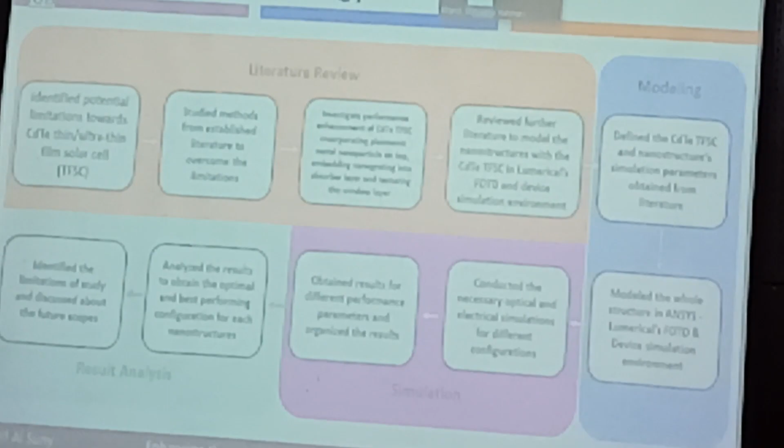So, our research methodology can be divided into 4 sections: literature review, modeling, simulation, and result analysis. First, in literature review, we identify what are the limiting factors that are affecting the performance of our cadmium telluride solar cells. Based on that, we further reviewed the literature to come up with different light trapping techniques that can enhance the performance.

After that, we define the simulation parameters from the literature and conduct a simulation in a simulation environment. We have used Lumerical device suite. Later, we conducted our simulation and varied the morphological features of the different nanostructures that we have implemented in our cadmium telluride solar cells. And finally, we came up with different results, and based on the results, we found the optimal configuration of our nanostructure that gives us the best performance for our cadmium telluride solar cells.

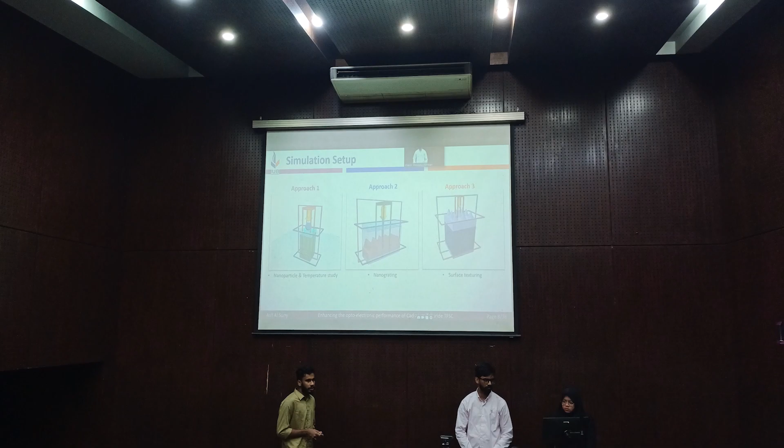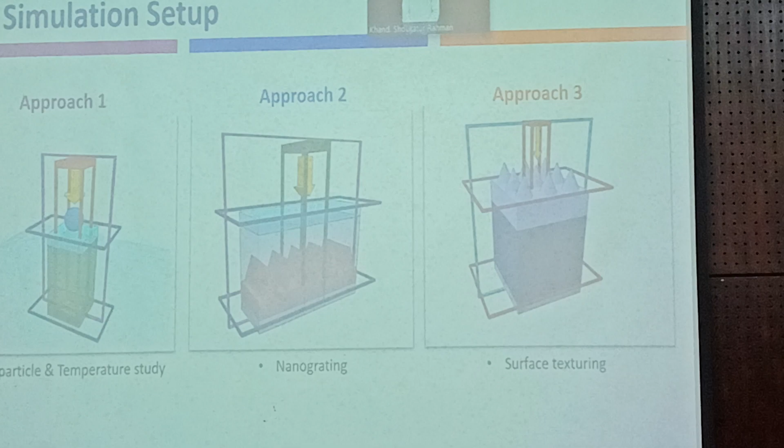So this is the FDTD solution setup for our first approach, where we have placed the metallic nanoparticle on top of our substrate. You can see the necessary monitors that are recording different parameters.

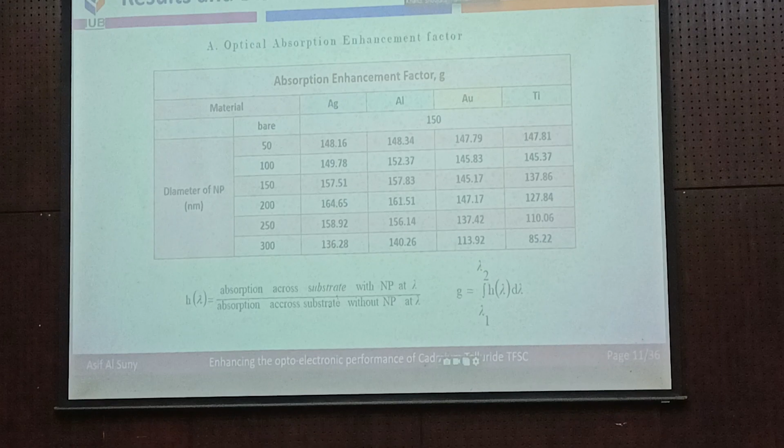The first performance parameter is absorption enhancement factor. It is measuring how much enhancement is taking place over different frequency points. We have taken 150 frequency points over a wavelength range of 400 to 1100, and you can see that silver 200 nanometer diameter nanoparticles are giving us the highest enhancement.

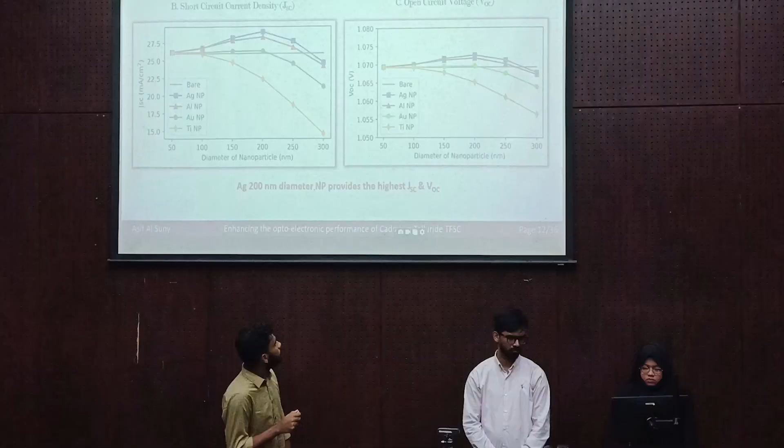This is the short circuit current density and open circuit voltage. You can see that in both cases, silver nanoparticles are giving us the highest enhancement.

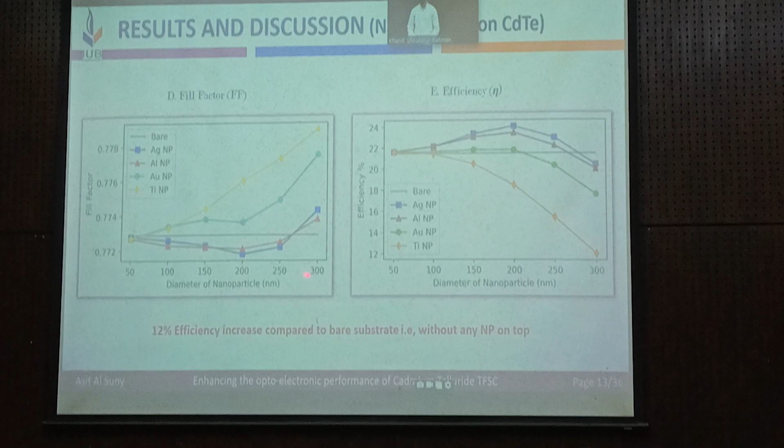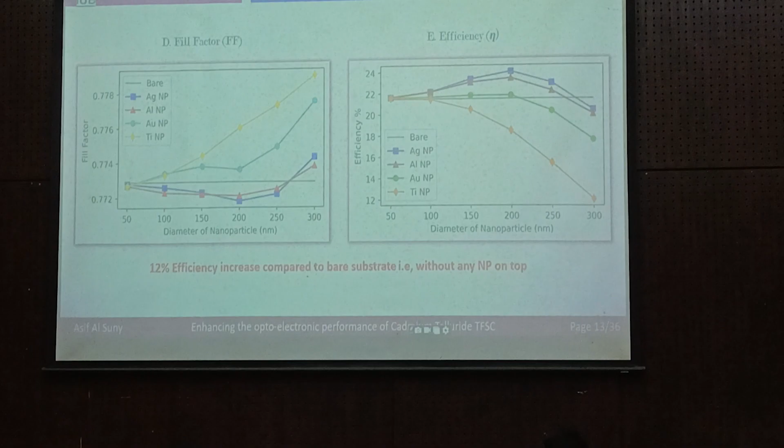Next, the fill factor analysis. However, silver is not giving the best performance. However, the change is not significant and does not affect that much when calculating the efficiency.

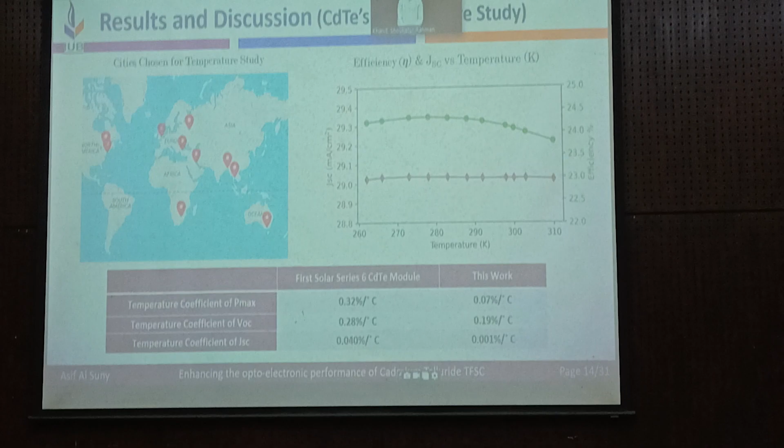We further did the temperature variation study where we have taken temperatures of 10 different cities around the world. For example, we have taken New York, Ottawa, Johannesburg, Melbourne, Dhaka, Bangkok, etc. We compared our results with First Solar's Series 6 module, and found that our proposed design is working much better compared to that module.

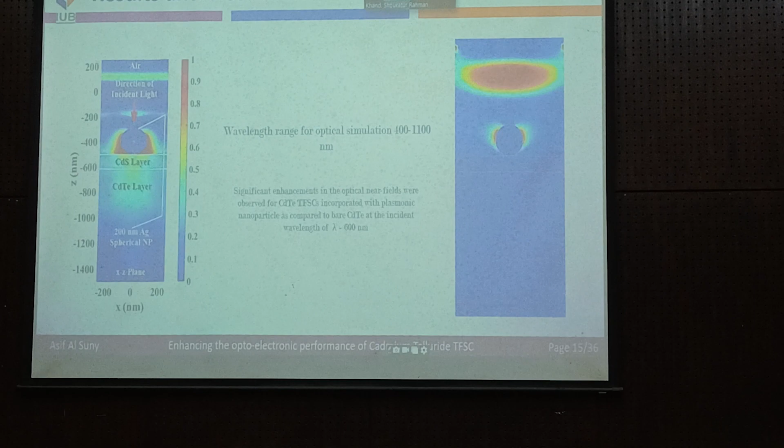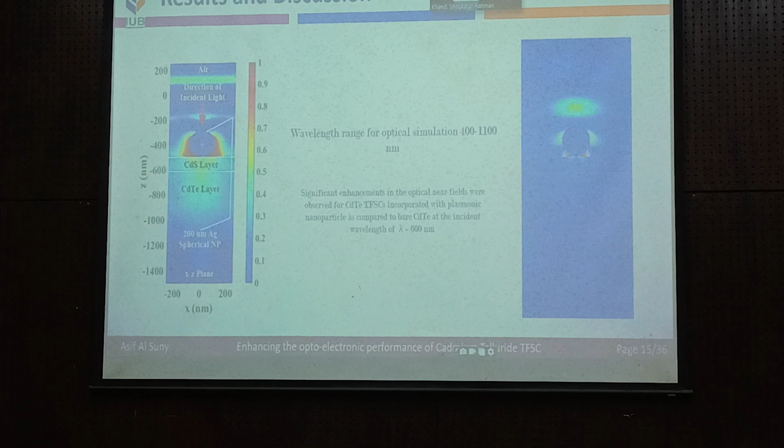This is the optical near field image, and the movie monitor which is capturing the electric field interacting with the nanoparticle and the substrate. We have generated this near field at a wavelength of 600 nanometers, and you can see the

enhanced light enhancement within the close vicinity of our nanoparticle, and it also helps it to generate more electrical field into this system.

Now I'll be talking about approach 2. As you can see, for approach 1 we placed a nanoparticle on top of the absorbing substrate. Now, fabrication of such nanoparticles is very difficult if we think in terms of fabrication.

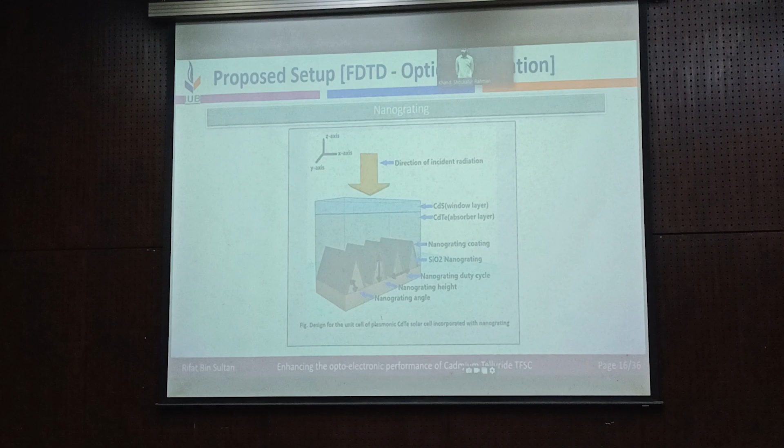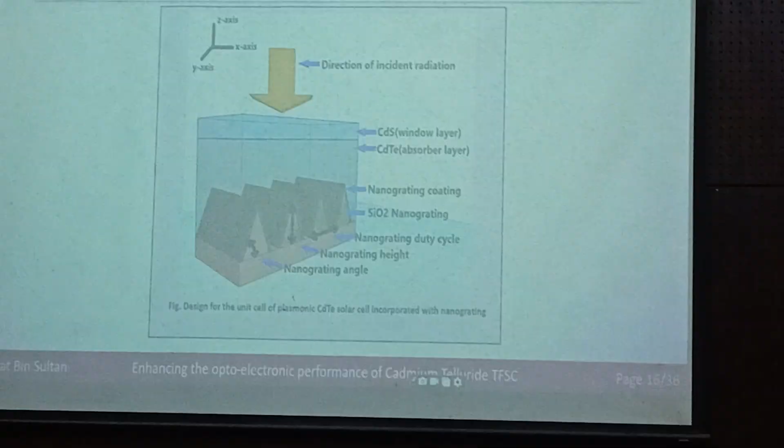Placement of these nanoparticles and making sure they stay in their right place and show proper function is very difficult in terms of fabrication. So for approach 2, we studied a more mature technology for enhancing the performance of our thin film solar cells.

That is, we tried to embed a nanograting structure within the absorber layer. Now this nanograting structure is essentially increasing the optical path length of the trapped light.

That is, the amount of light that is going inside the absorber layer is again being reflected back into the absorbing substrate. So the duration of the light staying inside the absorbing substrate is increasing, which in turn increases the conversion rate of photons to generate electricity.

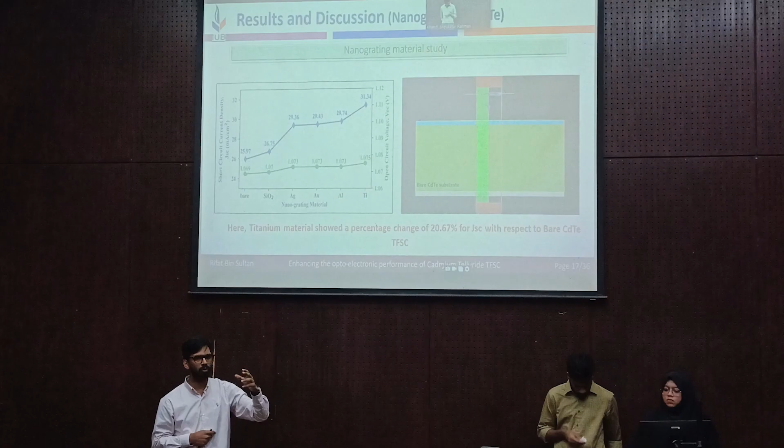Moving on. Now, if we are placing an embedded nanograting structure inside the absorber layer, it is very important for us to determine a good material selection for that nanograting.

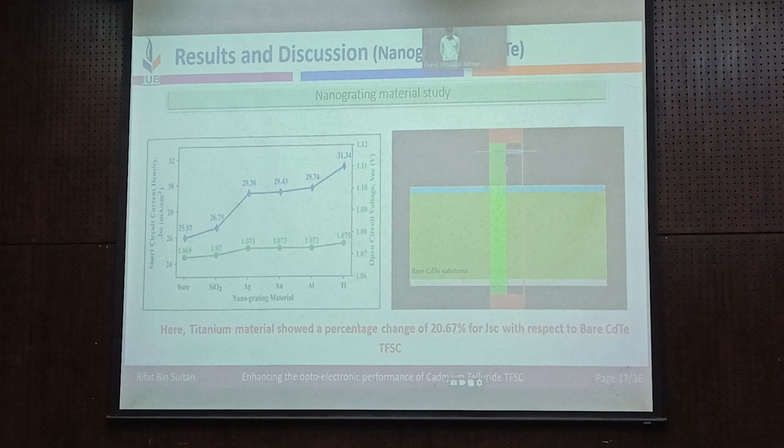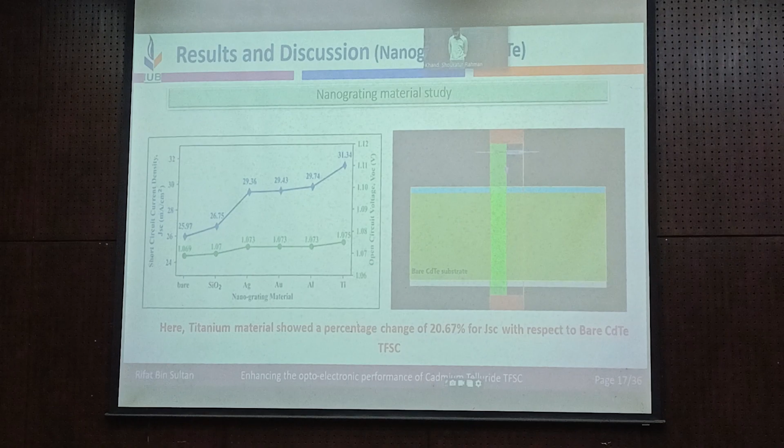So we did a material study for this nanograting, and we studied 6 different materials. Here, bare represents cadmium telluride thin film solar cell without any nanograting structure, whereas silicon dioxide, silver, gold, aluminum, titanium represent the material of the nanograting structure used.

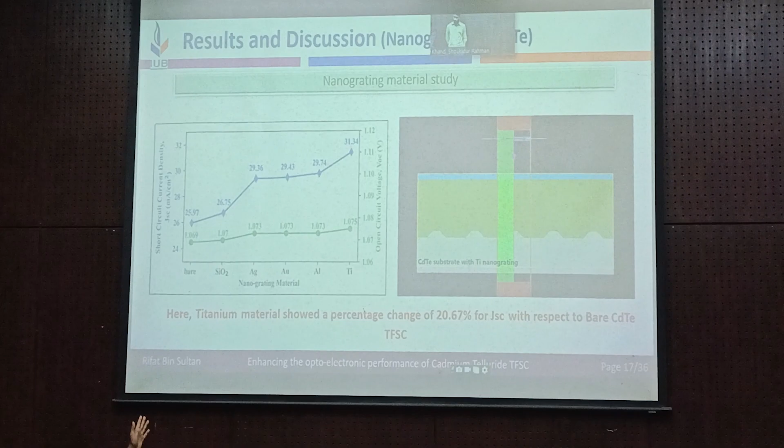As you can see from this graph, titanium stands out as the suitable material for fabrication of the nanograting that will be used. Moving on to the next slide.

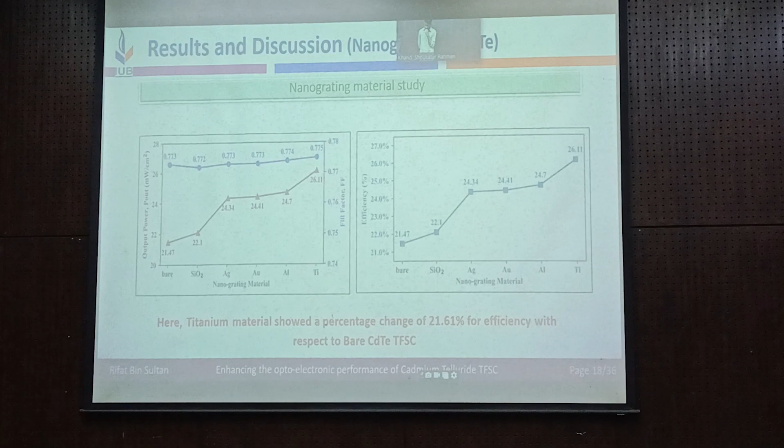We also checked some other electrical performance parameters that are economically or commercially more significant, for example output power and efficiency. In all these studies, titanium shows better results compared to other materials as a suitable material for the nanograting structure.

Moving on to the next slide. For this nanograting structure, there are many properties: nanograting height, nanograting duty cycle, and nanograting angle. All these parameters can have multiple combinations and multiple values of their dimension.

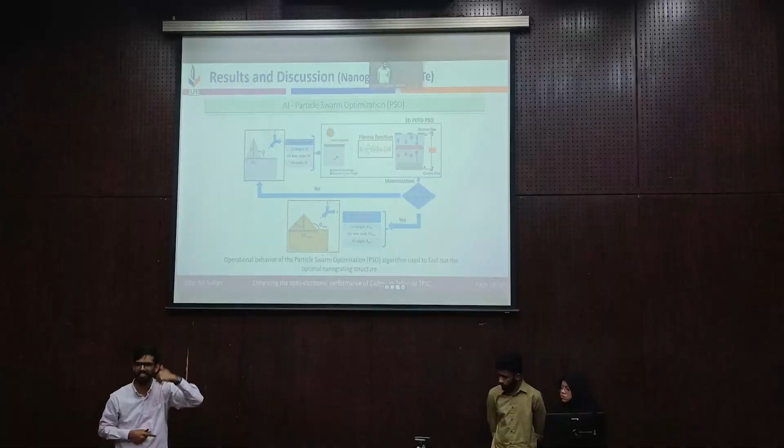Our chosen parameters were nanograting height, nanograting duty cycle, and nanograting angle. Using this algorithm, we set a range for all these parameters within the algorithm, and this algorithm was run based on different generation sizes, and they returned the optimized value for all 3 parameters.

Moving on to the next slide, we can see that for these 3 parameters we have set 3 different ranges.

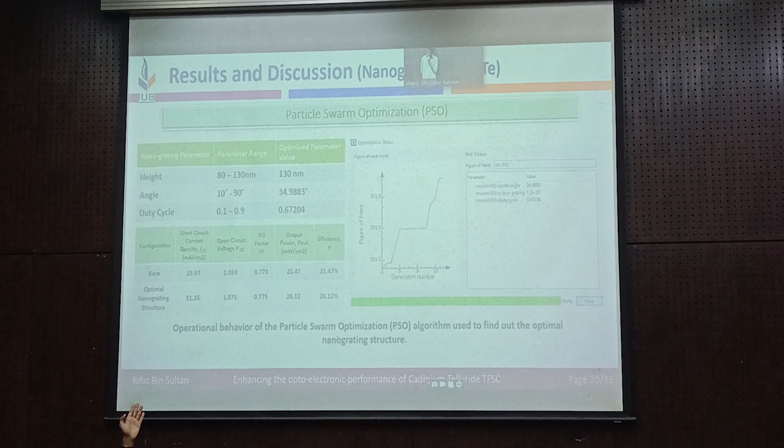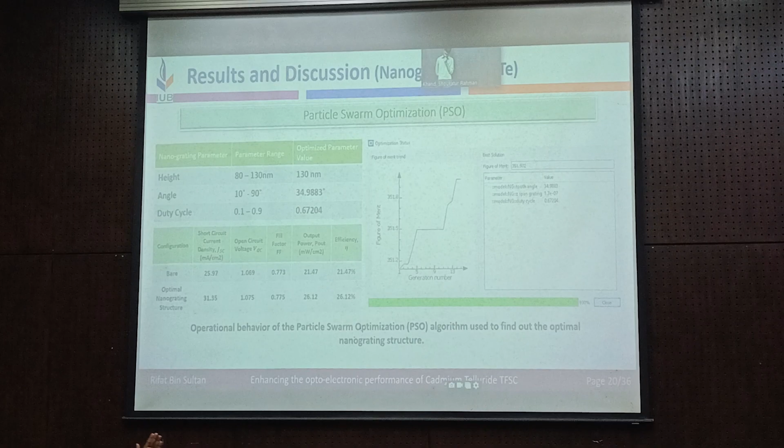For the nanograting height, the range was set from 80 to 130 nanometers. For angle, the range was set from 10 to 90, and for duty cycle, the range was 0.1 to 0.9. Within all these ranges, our algorithm returned us the most optimized value.

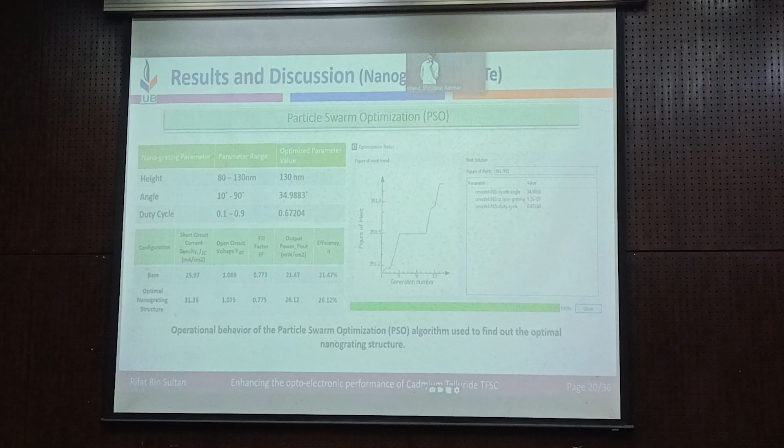What we did here is basically save a lot of computational power and let the algorithm return us the most optimized value. We can see, compared to the bare cadmium telluride thin film solar cell with no nanograting structure, the one with the optimized nanograting structure performs better in almost all the electrical performance parameters.

This is one of the screenshots that returned us the value with the optimized parameter, and this is the generation number. We set a generation number for the simulation as well, after how many generations we want our optimized value. This is how the optimization curve works, returning us the value of the highest short circuit current density.

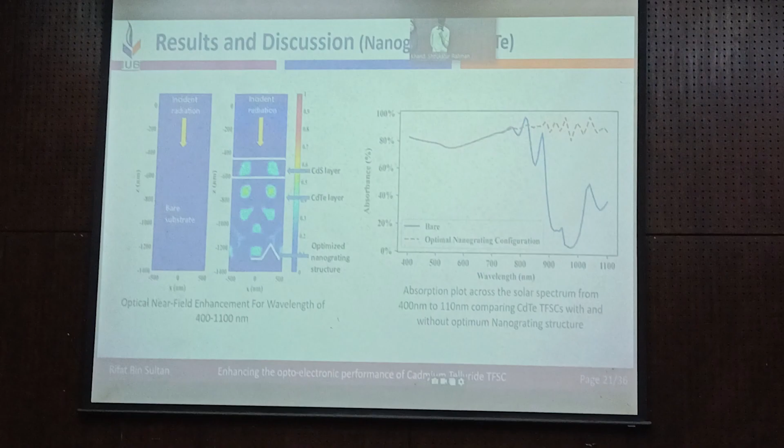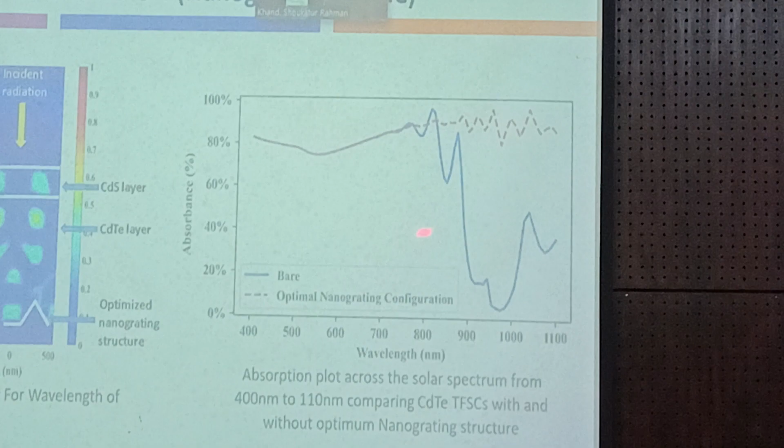Conventional solar cells help us trap only a small part of the solar spectrum, that is, only solar light within the UV to visible range. But our proposed structure is helping us harness solar spectrum beyond the visible range, allowing us to capture part of the spectrum beyond visible light.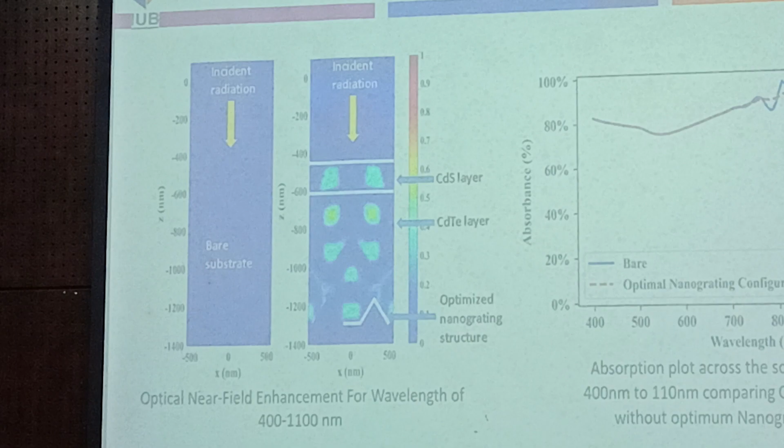We are getting wide spectrum absorption in our proposed structure compared to the bare structure, where in the near IR region there is almost no absorption. Our proposed structure shows absorption in the near IR region as well, so we are harnessing more solar power using the same structure.

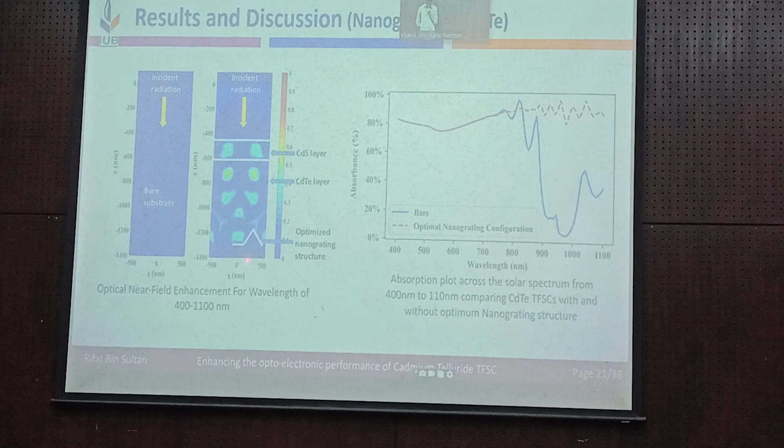This is one of the photos showing how the trapped light is being reflected back into our absorbing substrate, thus increasing its optical power. Moving on.

This is the FDTD setup for the proposed design, which is surface texturing with nanocones. As you can see, we have textured the CdS surface, which is the window layer of the solar cell, with nanocones.

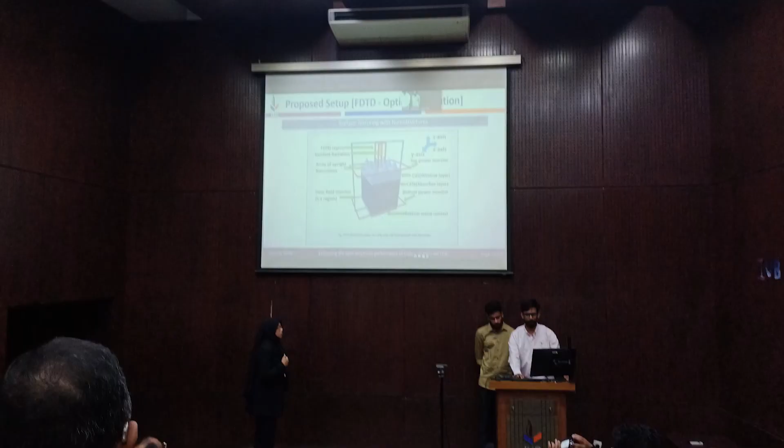So basically, we took 3 morphological parameters to determine which design gives us the most enhanced or optimized result for each generation. At first we kept the pitch constant, the cone-to-cone distance, at 100 nanometers, and changed the diameter and height range of the cone.

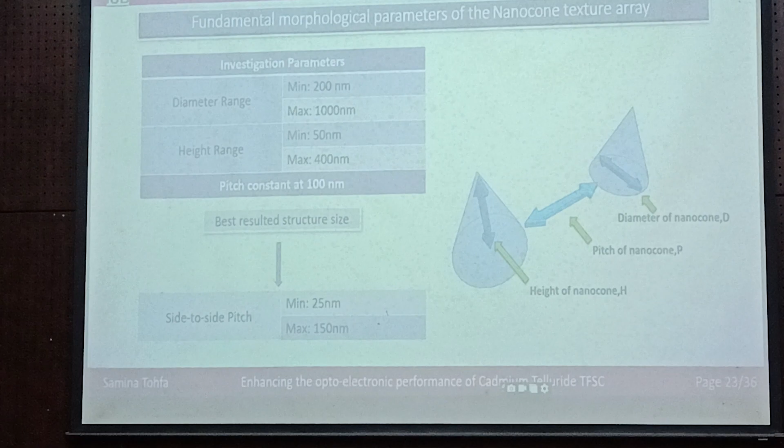After that, whatever structure gave us the best result, we used that for computing the side-to-side pitch result. And after that, whatever structure we came up with was the most optimized result for the proposed design.

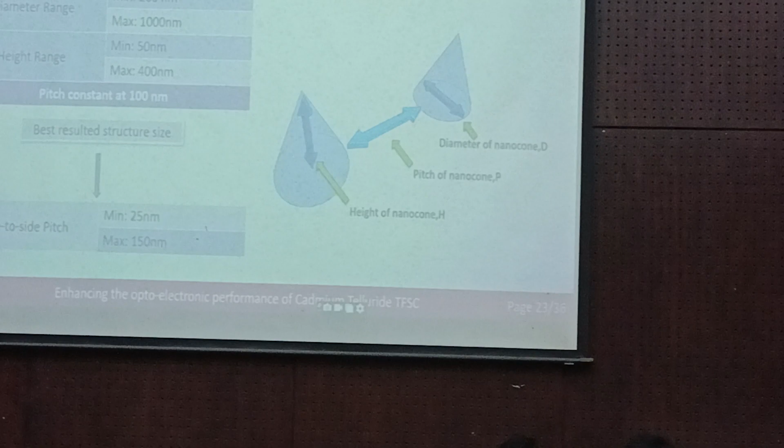As you can see, we normally use 6 numerical computational studies to determine which structure or solar cell works best for general purposes. One of them is the optical absorption enhancement factor.

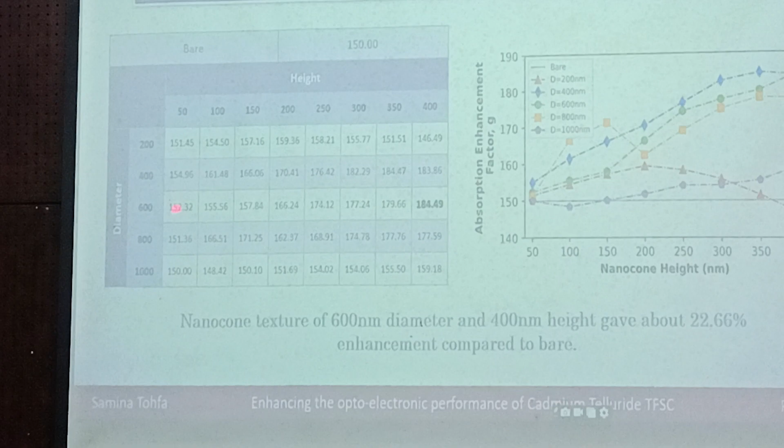As you can see, when we ranged the height from 50 nanometers to 400 nanometers, and the diameter from 200 to 1000 nanometers, the one with 400 nanometer height and 600 nanometer diameter gave us the most enhanced or optimized result for our set of results.

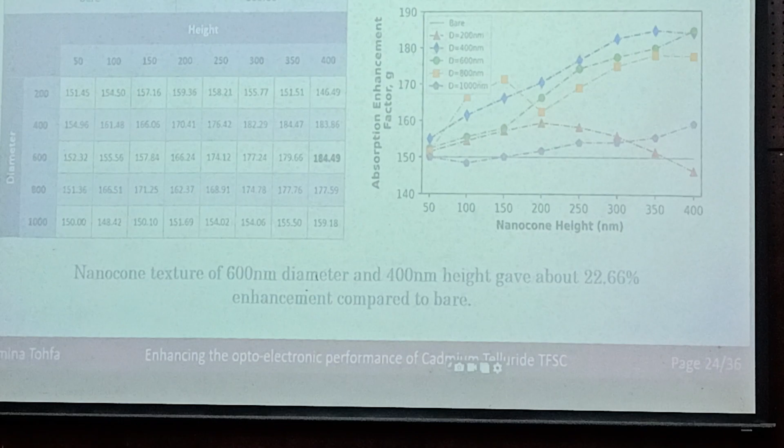It gave us about a 22.66% improvement compared to the bare structure, and that's how we chose the best results.

We even went through different parameters like Jsc, Voc, fill factor, and efficiency, and from there we found that the same structure gave us the most enhanced result in Jsc and efficiency as well.

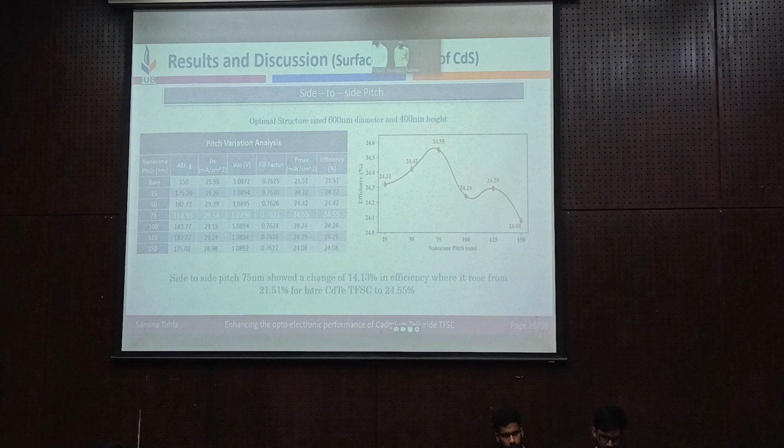After that, as we foresaw, we took the best result, which is the 600 nanometer diameter and 400 nanometer height, and we did the distance, or cone-to-cone, study.

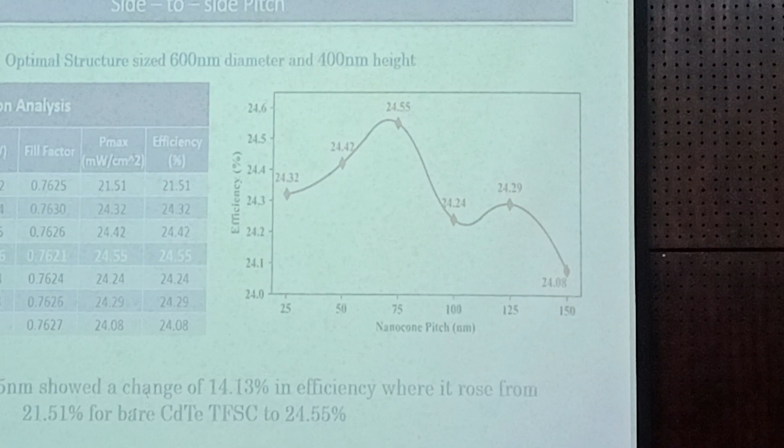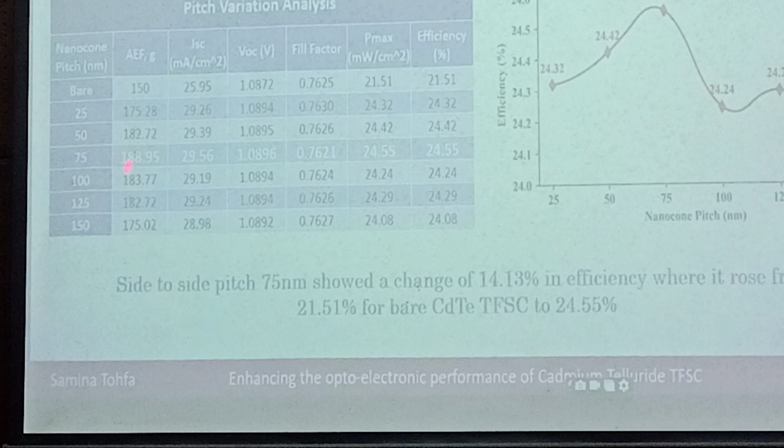So which structure would give us the best one? We ran through all the different distances, and the 75 nanometer distance gave us the most enhanced result compared to all the other distances. That's how we came up with the best result and the best optimized design for our product.

We always might get the question, why nanocone? Why not other shapes or other structures? So we tested all the structures, like four-sided pyramid, six-sided hexagon, and multi-faceted shapes, which is more like a dome.

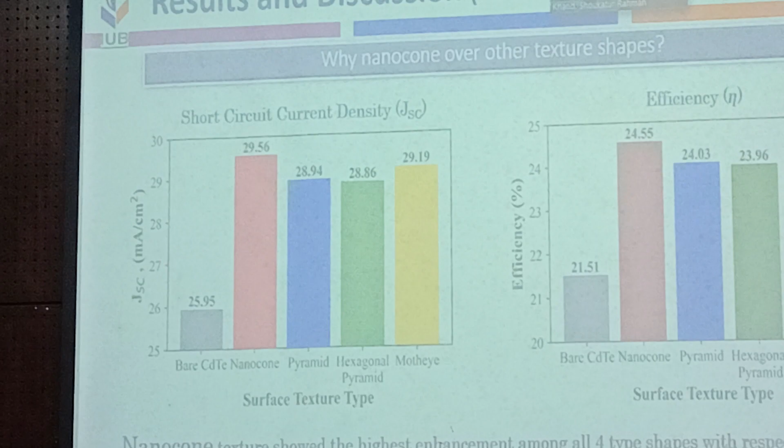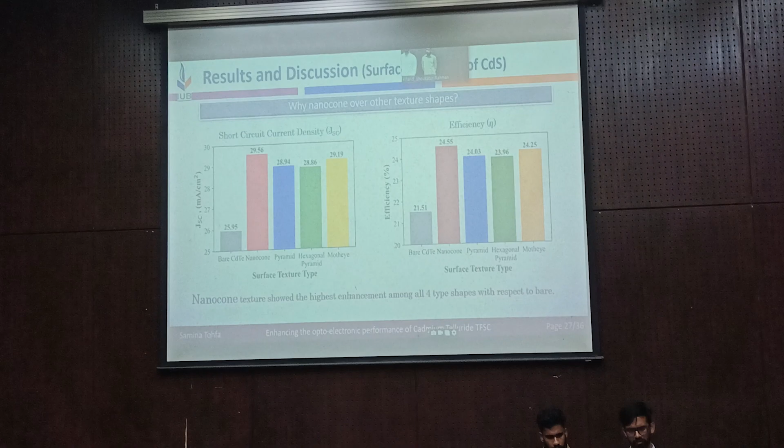We did the four-sided pyramid, then the six-sided hexagonal pyramid, then the multi-sided dome-like pyramid, and then the cone. After that, we found that the nanocone gives us the best result. Obviously all the structures give significantly better results than the bare, but the nanocone gives enhanced efficiency, accuracy, and other parameters compared to the other structures. That's how we came up with the solution that nanocone will perform better than all the other shapes.

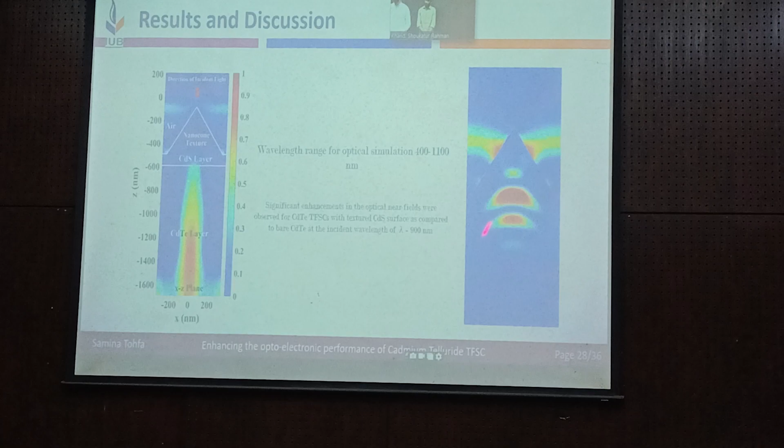So this is the optical visualization. As you can see, even when light gets into the substrate, it's not only the substrate but the nanocone that's helping, it's also light trapping all the light going inside the nanocone, and that's how we define that. Pretty cool. The nanocone array surface or array structure will be one of the parameters for doing more on this.

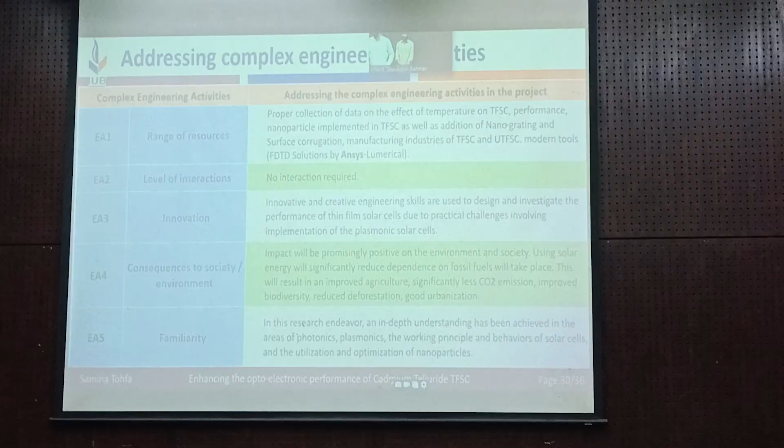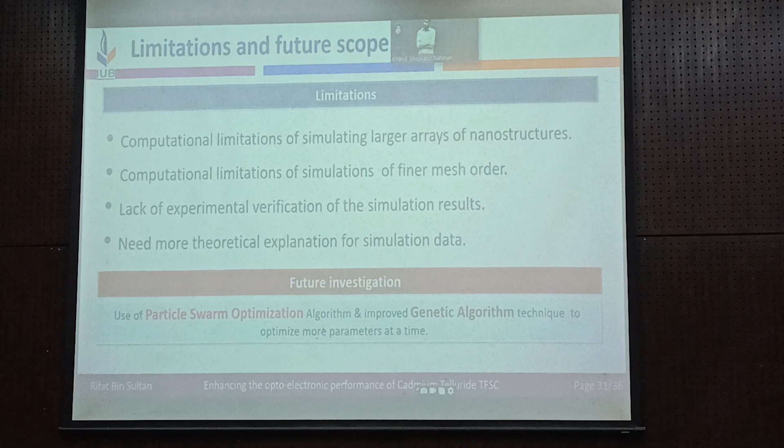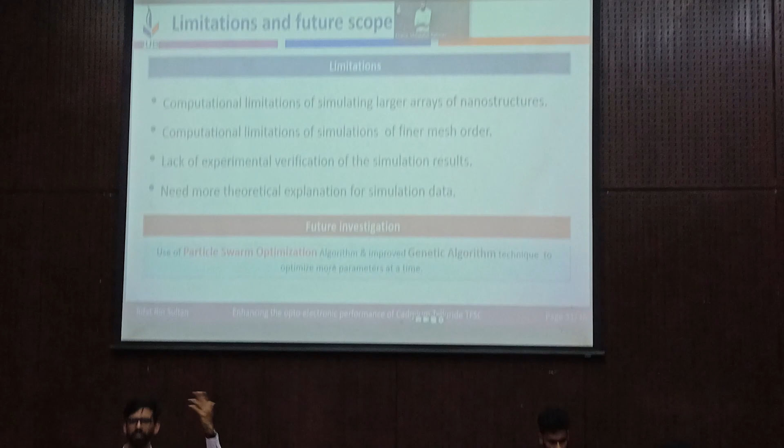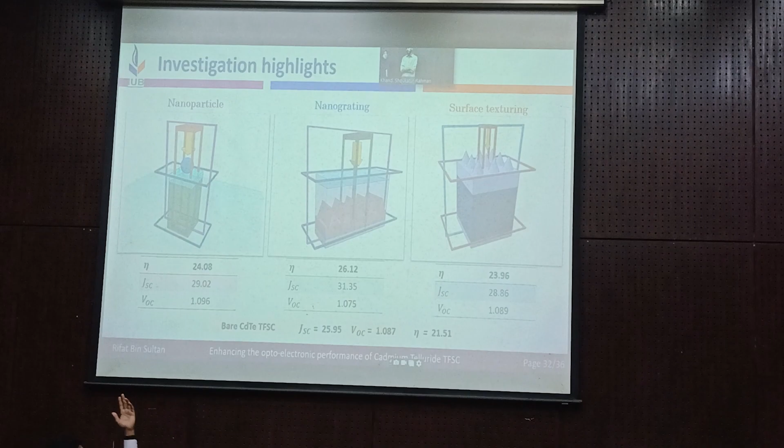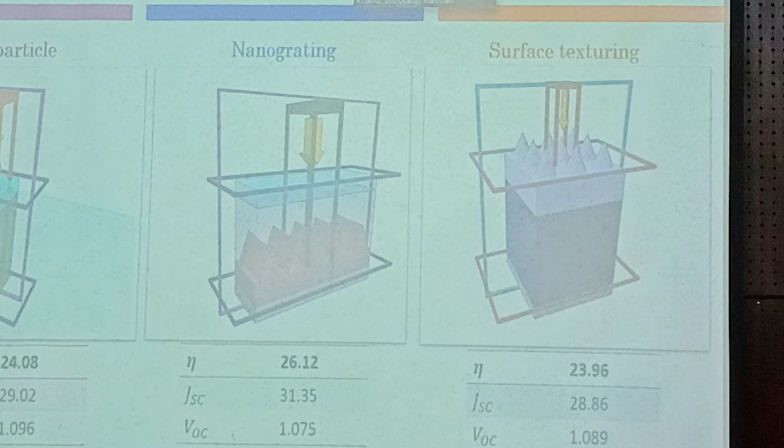For the second approach, what we do is place the nanograting structure in the absorber layer, because it is a more mature technology and, fabrication-wise, a less complex technology.

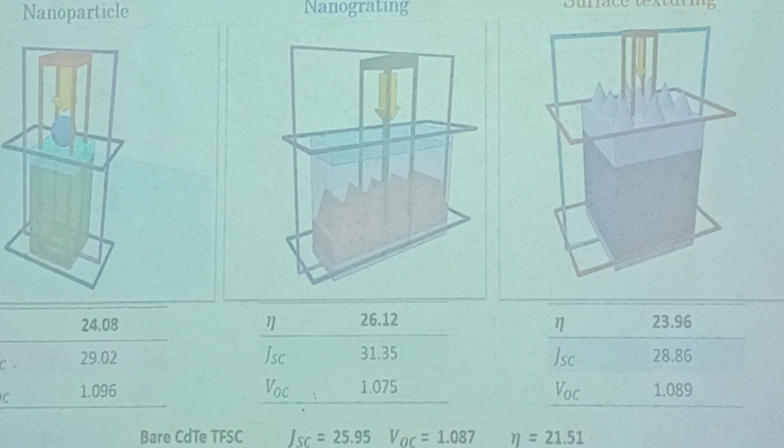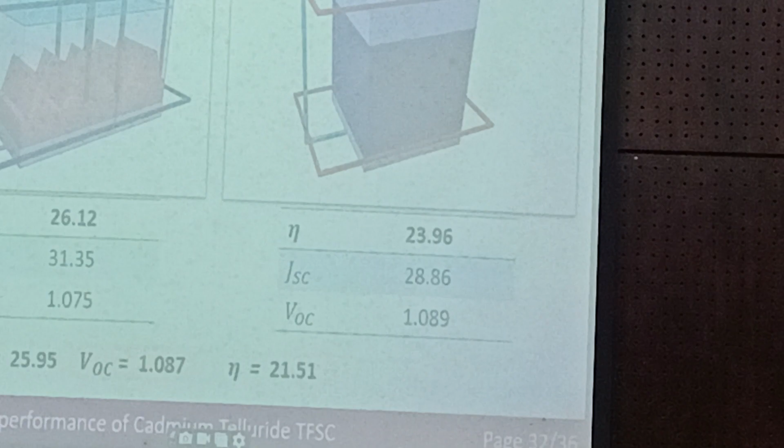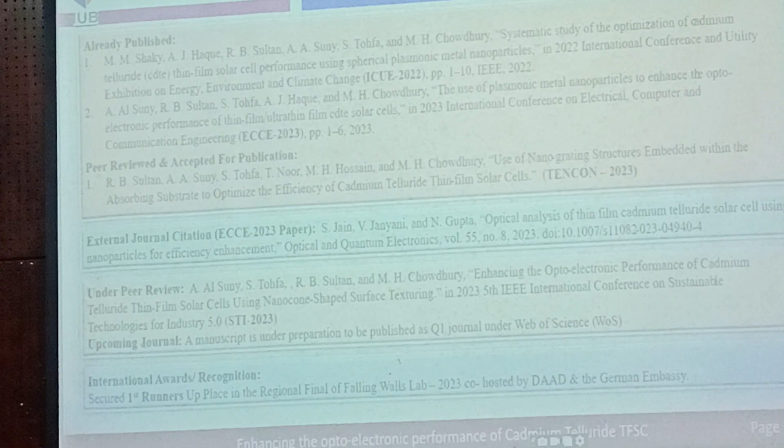Overall outcome from this project was being recognized alongside an Indian research group; our paper was cited in the journal.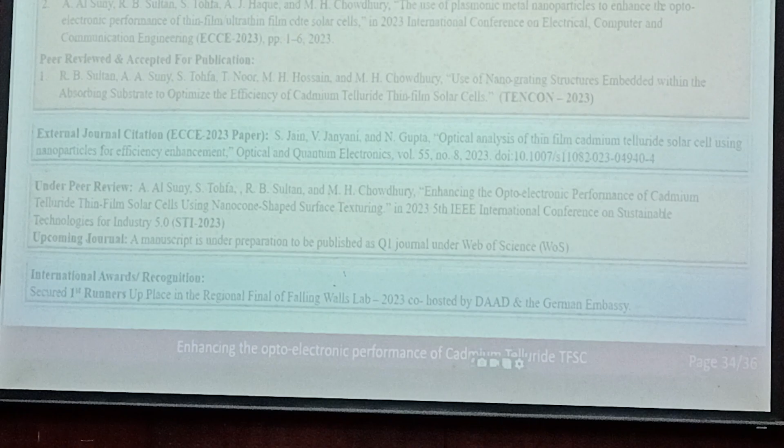Finally, one of our papers is right now under peer review, which we just submitted to the STI conference. And our proposed research methodology and topic was also presented in the Falling Walls Lab 2023 competition in the regional final, where this idea presentation won first runner-up place.

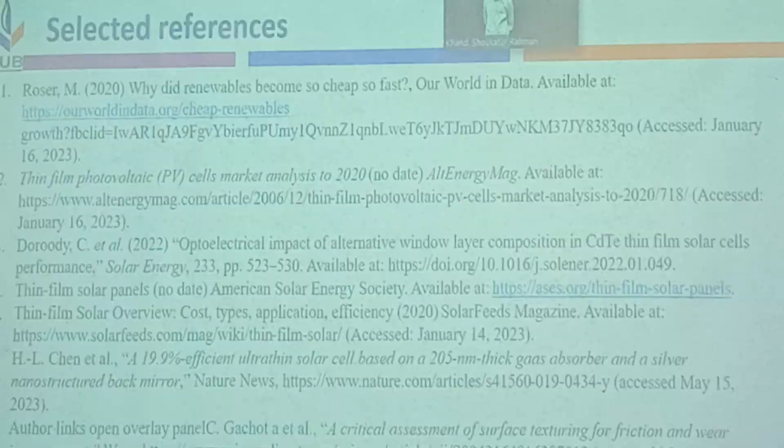Another journal publication is under process now; a manuscript is being prepared which will be submitted soon for peer review. These are the references we consulted at different points during our EEE400, and this was our presentation for EEE400. Thank you everyone.

Okay, just a minute, I have a question. Go to the limitation, you mentioned something. You mentioned that silicon-based solar panels or solar systems have a much longer payback time compared to this. What is the reason?

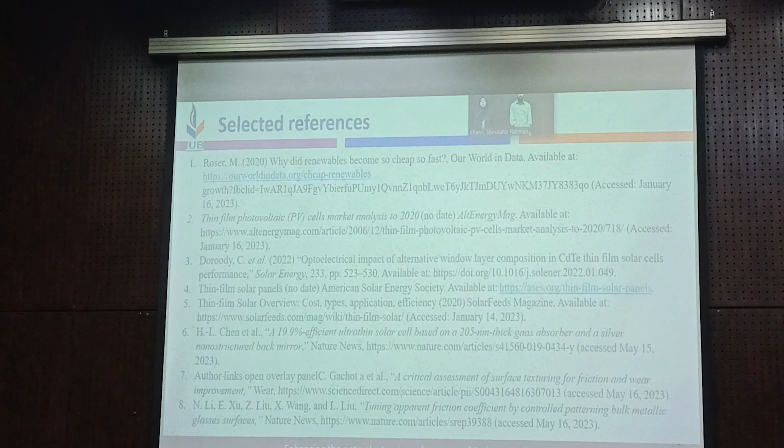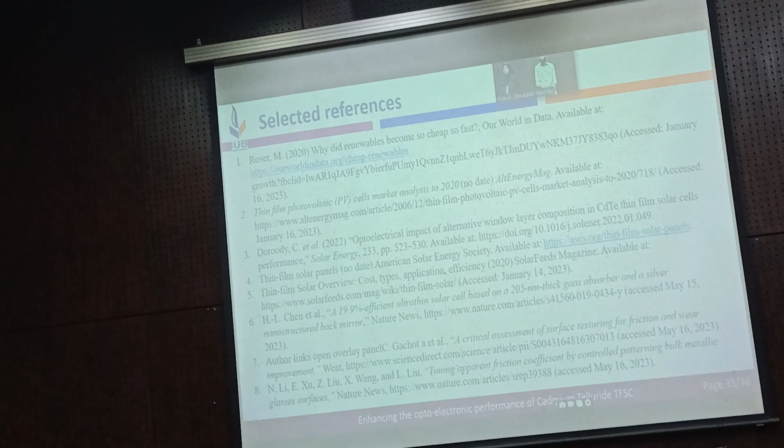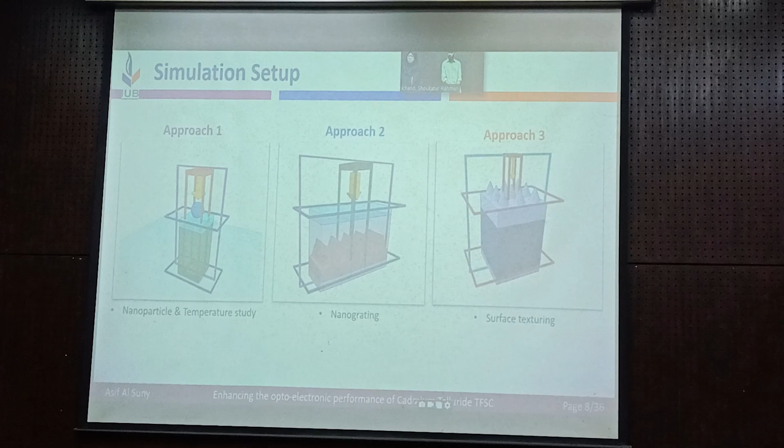We use the software, sir. We use the software platform to simulate every approach we mentioned during our presentation. We verified our performance parameters through this software, and this is commercial software which is used to test and simulate the thing in solar systems.